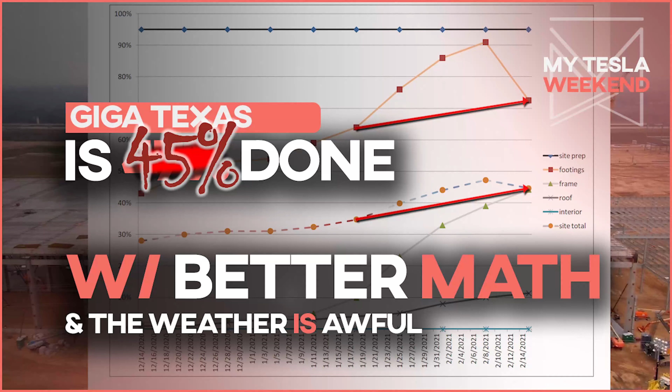Giga Texas is back down to 45% complete, with some improvements to the math.

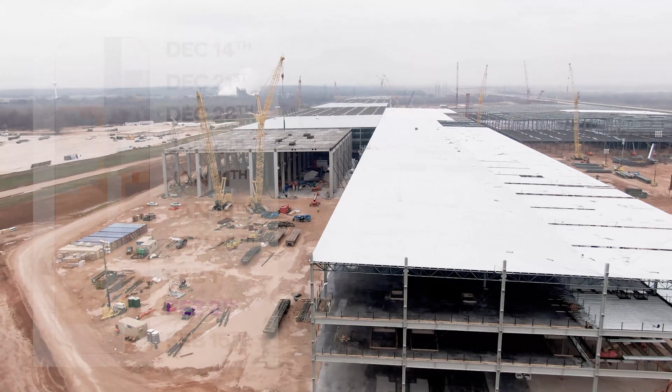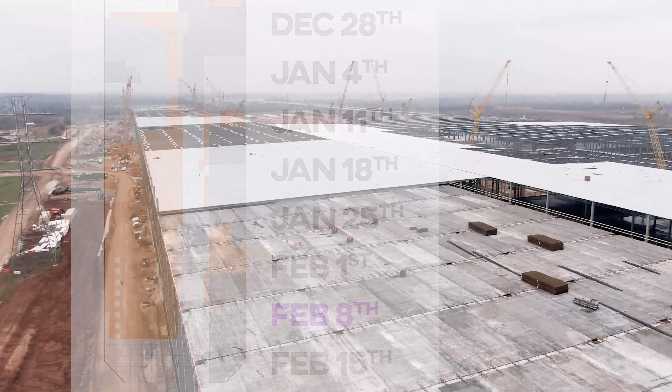An astute observer last week noticed that the footings were approaching 90% complete on the graph, but they weren't in practice, not visually, and not with counting on the sitemap either. I found the error in the equation and have corrected it, and the completion target date has changed, so please stick around until the end to see it.

The progress this week has been slower than usual across the site due to an unexpected snowstorm blanketing the area with freezing rain, or I guess less blanketing than sheeting it, but either way it's under the weather, and whether human or factory, it's not the ideal conditions to get things done.

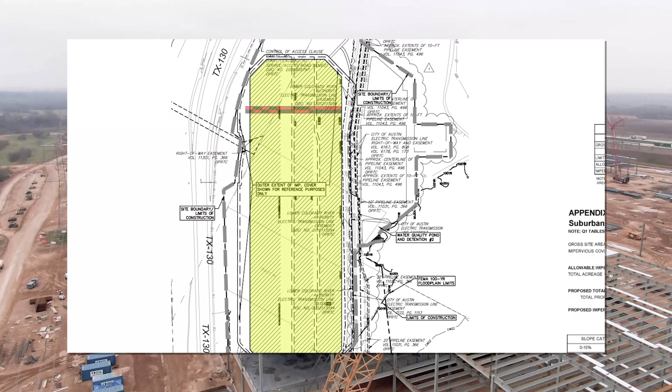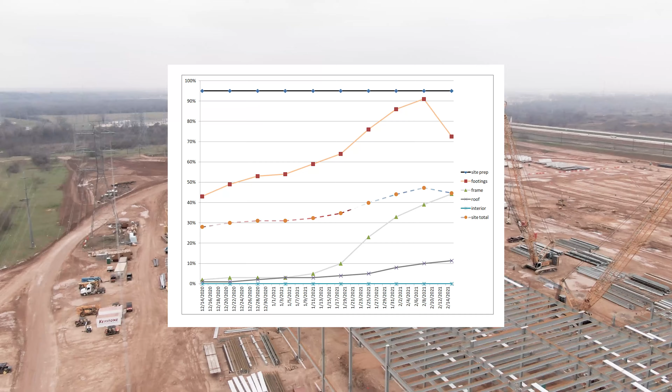First things first, and I have to say this because in past weeks you guys have stopped the video before we got this far, let's look at the progress chart by category so you can see how it's changed, and it's changed badly. I had hoped there would be enough progress this week that it wouldn't look quite so bad, but the ice storm hit.

My biggest beef is that things ground to a halt, so here we are. Giga Texas is 45% done, and if you look at the tracker with the proper trajectory, it's still good, just not as good as we might have hoped in the past few weeks.

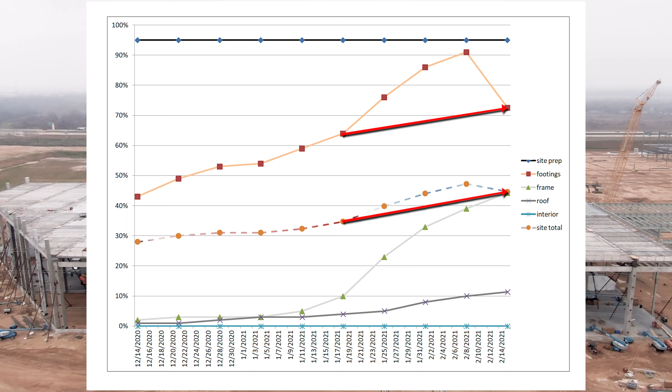Those hopes were based on faulty figures, misplaced math, and faith in a shaman who hadn't adequate accuracy, namely me. I'm the shaman in this parable. I know, I'm not happy about being the false prophet either. This is why it's so helpful to have you guys double checking my math, and I thank you for that.

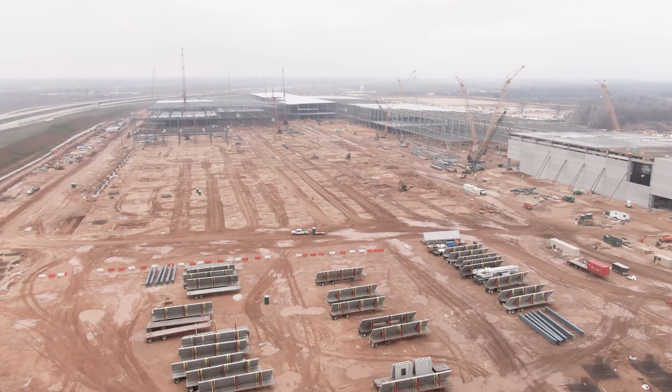So here's how the site looks as of February 15th. And let's roll it back to December 14th and watch it go by week. The orange is the footings, the gray is the frames, and the dark gray indicates rough roof completion. The final roof won't be counted until we start counting the interior completion, which likely won't start until the buildings are largely closed in from the weather, which is still probably a few weeks out at least, I would think.

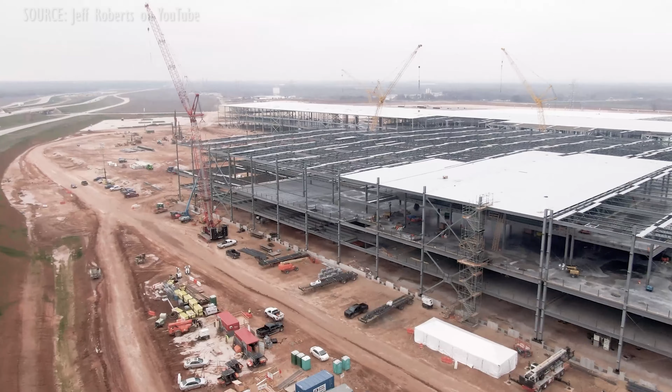Once the walls close off, we'll start the 4-month countdown tracker for those areas, based on the time frame in Shanghai's phases 1 and 2. Considering how much interior work has already started in Austin, it's fair to say that your Cybertruck will be rolling off the line sooner than the Wall Street analysts think, but who cares, because those guys are notoriously wrong about almost everything, despite how much money they charge you for their pretense of being smarter than the flip of a coin.

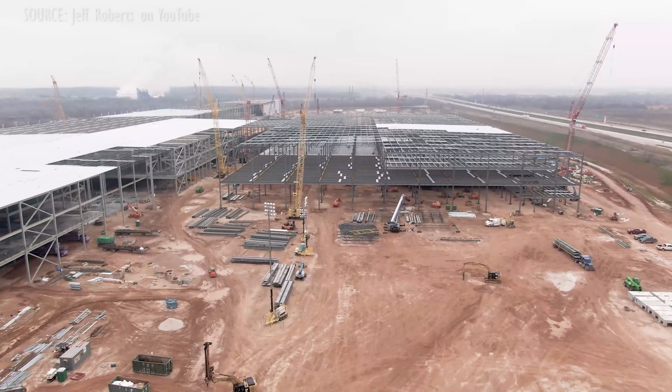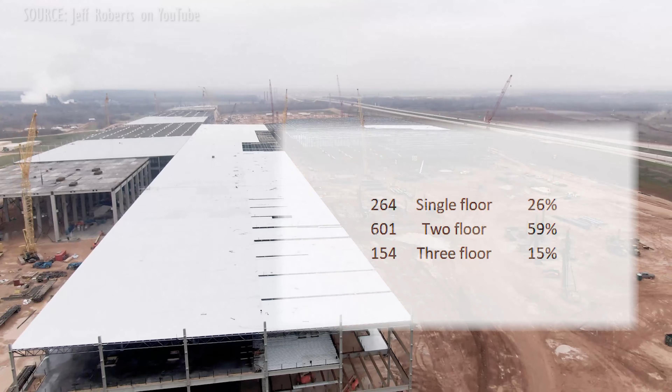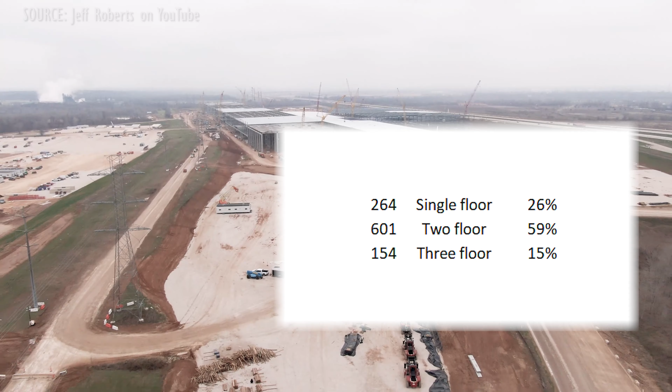For an added stick of deep-fried funzarella, let's look at the floor count, which is currently at 26% single floor, 59% double floor, and 15% triple stacked or higher, specifically to a maximum of a 4th floor, but only specifically along the loading docks along the west side, the specific northwest, if you will, so we'll just call this the Northwest Passage.

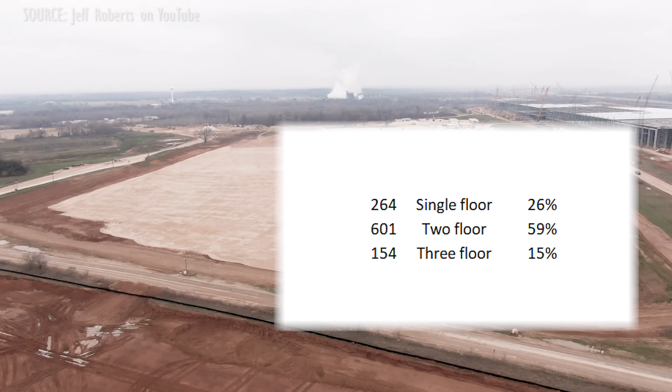So here it is, at the current pace, the main site in Giga Texas will be finished in 468 days, which is to say it will reach completion on or about November 1st of 2021.

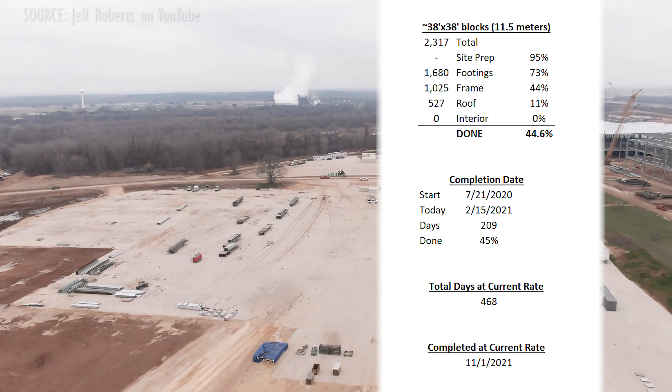Bear in mind, there are a number of other projects underway around the site that could slow this down, and there's also no reason for the whole building to be finished to commence production, which could speed it up.